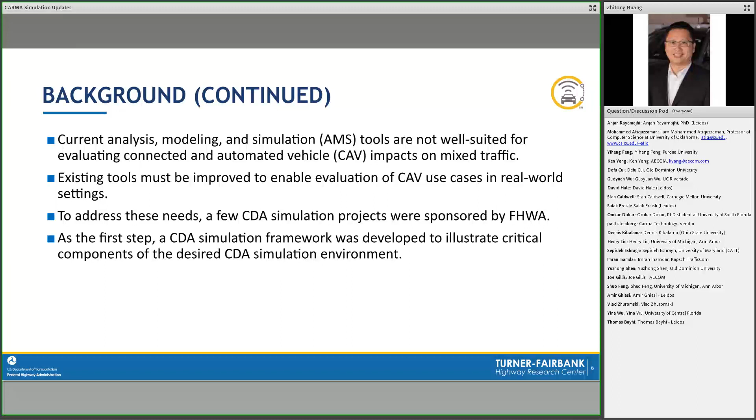So to identify the desired CDA simulation environment, the project team did comprehensive literature reviews and also collected suggestions from CDA technology users and experts. According to the results, a multi-simulation focused evolutionary framework for progressing CDA simulation capability is presented as shown on the right side of the figure.

This figure shows the desired CDA simulation environment has 5 major simulators: vehicle driving simulator, traffic simulator, traffic management center simulator, pedestrian simulator, and human driving simulator. Different simulators handle different CDA simulation needs. These simulators are synchronized and organized by a central simulation manager.

This core simulation functionality is then further enhanced and leveraged by a class of enabling technologies such as augmented reality and virtual reality, cybersecurity, artificial intelligence, and machine learning. Those are not the only potential enabling technologies. Many advancing technologies may open new doors for future research, but this area seems most closely related to the current research at this time. So in the next few slides, I will introduce these simulators and enabling technologies one by one.

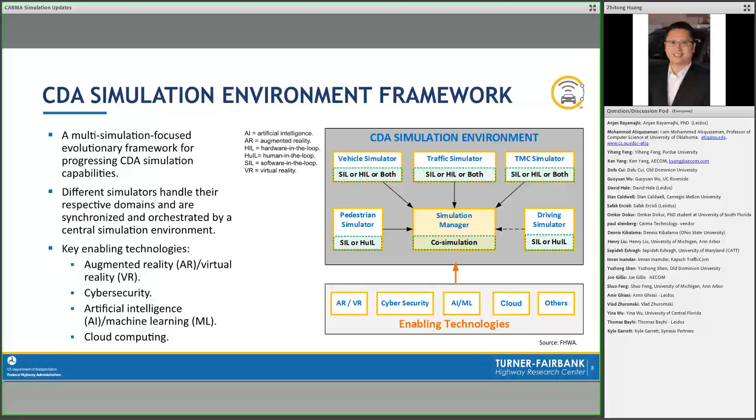So before CDA technology appeared, transportation engineers focused on optimizing infrastructure operation to improve the efficiency of the transportation system. Usually we provide more real-time information to drivers, such as dynamic speed limit and variable message signs, to help them make a better decision to drive their vehicle, to reduce congestion and improve safety. But there are very limited strategies to control the vehicle.

By implementing CDA technology in the transportation industry, it brings opportunities to let us control both vehicles and infrastructure to further improve the performance of existing transportation systems. On the other hand, we also need to have a vehicle driving simulator to make sure the proposed CDA application and algorithm are feasible to be implemented in physical vehicles, and also to make sure the CDA-equipped vehicle behaves as we expect.

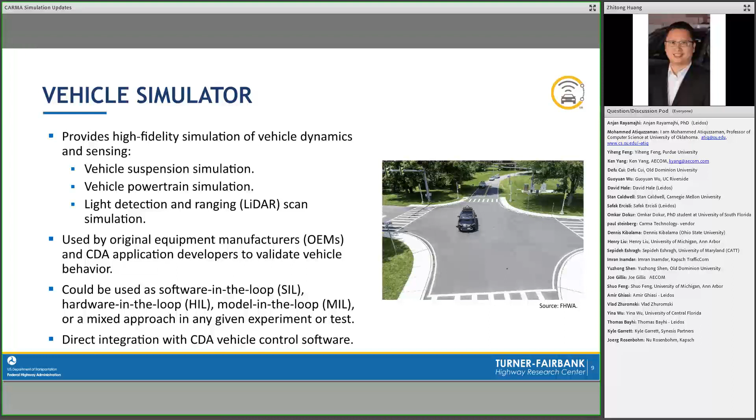So traffic simulator is very familiar for us. It is also a critical component of the desired CDA simulation environment. The traffic simulator can provide microscopic views of behaviors in the traffic system, and it can simulate the effects of the CDA system under test on that network.

It is widely used by state and federal Departments of Transportation for evaluating road designs, new traffic applications, and traffic management strategy, same as a vehicle driving simulator. Traffic simulator could be implemented by different approaches, such as software in the loop, hardware in the loop, and model in the loop, depending on the research needs and testing scenarios.

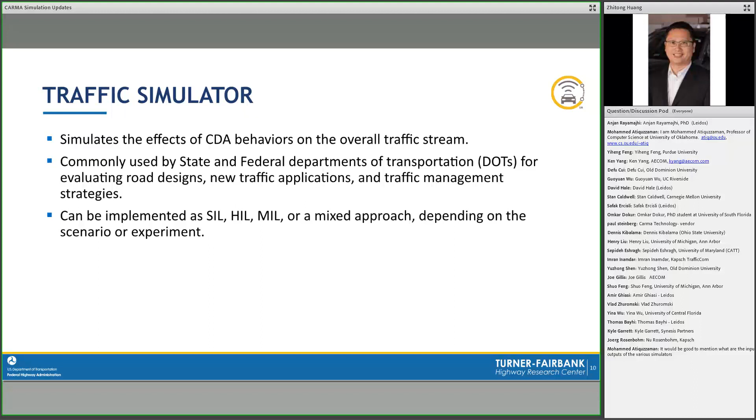Traffic Management Center is responsible for responding to incidents and events that may impact traffic system operation.

Because of the vehicle-to-everything communication feature, CDA technology provides an increased opportunity for interaction between CDA-equipped vehicles and the TMC. It becomes useful and necessary to study how this interaction occurs and what kinds of impact it may have on the transportation system.

It will help us develop the next generation of traffic management control strategy. So the preliminary model for this kind of interaction is CARMA Cloud, a system which provides real-time data feed into CARMA-equipped vehicles, alerting them to lane closures, weather events, and other events.

So the TMC simulator could help us test new CDA applications involving TMC interactions, such as testing new transportation systems management and operations use cases, and evaluating the effectiveness of different TMC strategies or algorithms.

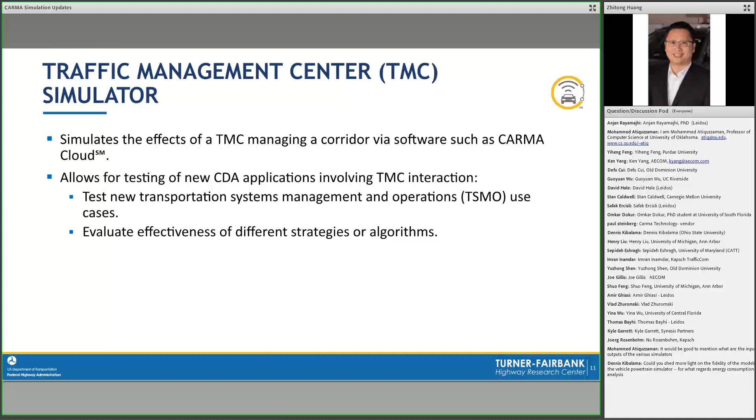The Pedestrian Simulator is another major simulator in the CDA simulation environment because safety is the most important aspect in transportation system operation and management. It's necessary to evaluate actions and behaviors of pedestrians and other road users with CDA-equipped vehicles.

For most pedestrian or bicycle-related CDA applications, safety is a major concern for testing. So with the pedestrian simulators, the CDA simulation environment could provide a safe environment for testing and evaluation of vehicle-to-pedestrian systems without any risk to participants' safety, because it can eliminate the direct interaction between a physical human being and physical vehicles.

For example, by using hardware-in-the-loop simulation for V2P testing, a pedestrian can walk in an isolated room for testing. The actions of the pedestrian will be translated into a simulated pedestrian walking at an actual intersection, letting a physical CDA-equipped vehicle interact with the simulated pedestrian.

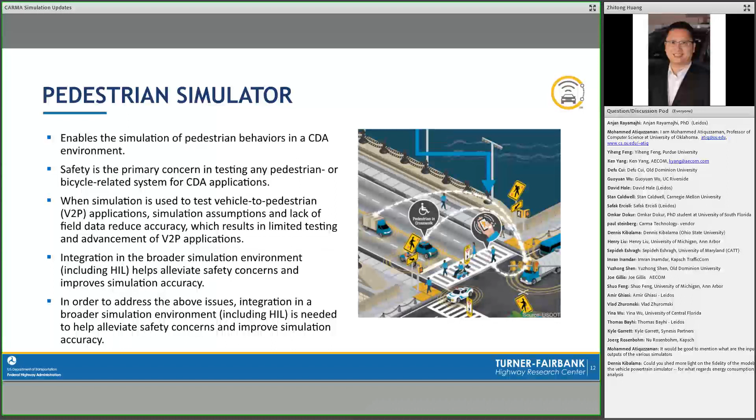Human driving simulators are widely used for human factor-related study in the transportation field. Integration of the CDA simulation environment with a human driving simulator could benefit researchers in the CDA field.

It can increase the accuracy of human driver behaviors for CDA research efforts. It also increases the accuracy of CDA application behavior for human factor research.

The same as the pedestrian simulator, if the human driving simulator is used with hardware-in-the-loop simulation functionality in the CDA simulation environment, it could enable safe, accurate study of how human drivers interact with real CDA-equipped vehicles, since human drivers and human-driven vehicles only virtually interact with the physical CDA vehicles.

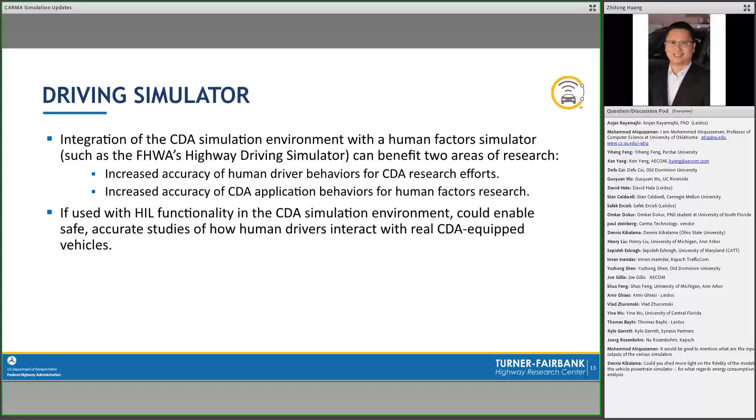As we mentioned before, the simulation manager is the core of the CDA simulation environment, since it coordinates and synchronizes different simulators, especially for data exchange and time synchronization. The simulation manager becomes more sophisticated over time as more simulators are added to the system.

The simulation manager also provides a uniform interface to let the user integrate with the CDA simulation environment by selecting their desired simulator.

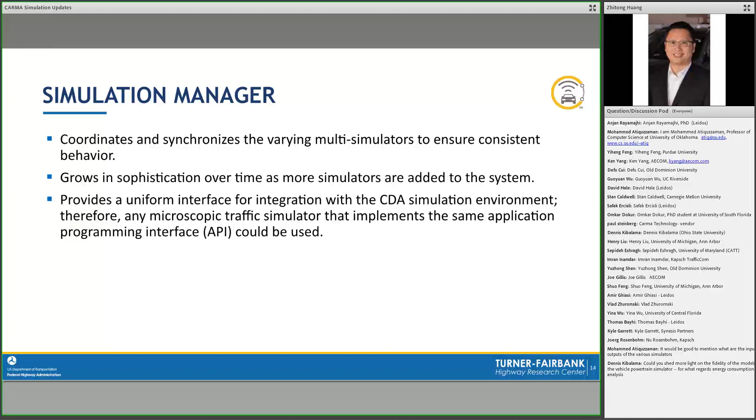We also want to bring a class of enabling technologies to further help us conduct CDA-related research. So the first technology we want to bring in is augmented reality and virtual reality. These two technologies are very helpful in CDA research.

It enables exciting new opportunities and also mitigates or eliminates any safety concerns, especially with hardware-in-the-loop simulation, as in the example I mentioned for the pedestrian simulator.

In addition, AR and VR can also act as a virtual link between the virtual simulated environment and the physical environment, visualizing the interaction of virtual vehicles with physical CDA vehicles and physical human subjects, and virtually demonstrating the virtual simulation environment.

It also can help us do data visualization for both physical vehicles and the simulation environment. More importantly, it significantly improves the demonstration capability at a test site.

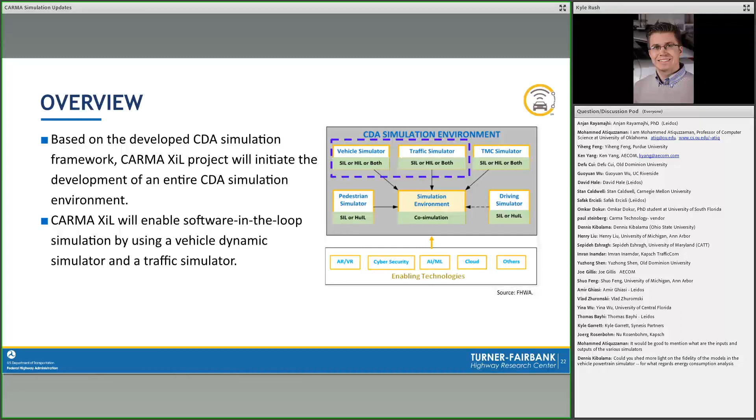So one of the first fundamental steps of building out this XIL project is to integrate the vehicle dynamics simulation and the traffic simulator with the CARMA ecosystem. The CARMA platform will be the primary cooperative driving automation system under study for the XIL platform.

It's the platform we're hoping to use to integrate applications into the simulation environment so we can begin to see their effects either from an individual vehicle level in terms of the controls behaviors of that vehicle, or at the broader network level as we evaluate things like how it impacts throughput or other traffic metrics. So we're developing this co-simulation platform to support that goal.

We're utilizing CARLA, Car Learning to Act Simulator, as well as the Simulation of Urban Mobility, or SUMO simulation software, for their vehicle dynamics and traffic network simulation respectively. CARLA will be the primary integration point for the CARMA platform, being the vehicle driving simulator best suited towards integrating cooperative driving applications or autonomous driving systems for our particular use case.

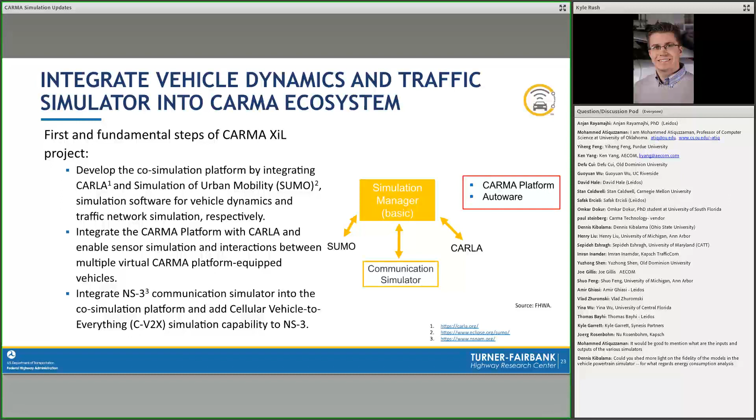The step beyond that, once we have the CARMA platform integrated for the study of its internal cooperative driving automation applications, would be to integrate the CARMA Streets platform into this entire framework. This is our second step into building out the CDA simulation framework: to bring in the CARMA Streets software integrated with SUMO to act as an edge compute device capable of running algorithms for traffic signal priority or other sorts of shared perception kind of applications.

Integrated with SUMO, communicating via the communication simulator with the CARMA platform vehicles, to enable the implementation, evaluation, and study of those algorithms and how they impact the traffic stream, how they impact the CARMA vehicles, and how they perform in and of themselves.

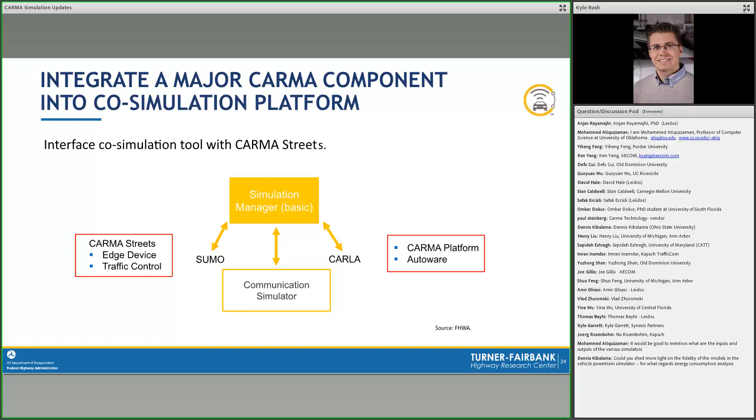So this integration will be done at the SUMO level, also plugged into NS3. It would be communicating with SUMO's internal traffic signal controller logic and would provide an entry point for application development on the infrastructure side of this simulation. And once again, this would come with an increased sophistication of the simulation manager itself, to support these new kinds of applications or use cases within the simulated environment.

Once the XIL simulation platform is finished developing and testing, we plan to release this tool to the public for support of development, testing, deployment of CDA algorithms and applications, so that the CDA algorithms and applications themselves can be evaluated by others and run in different scenarios, different test cases to continue and carry on some of this research.

We also plan to make it available for helping users to adapt and use the CARMA platform to support their own CDA research, whether this is at the prototype phase before building applications to deploy on physical vehicles, or whether this enables those who might not have access to physical CARMA platform-equipped vehicles to conduct their own cooperative driving automation research without having to go through the expense of acquiring a vehicle.

The project team also plans to provide technical support to users under the CARMA Support Services program. The CARMA Support Services program is a help desk run by the Saxton lab that provides technical support services, documentation, troubleshooting to users seeking to use any of the CARMA program software or having questions in general about cooperative driving automation. This help desk will, at this point, provide support for the XIL co-simulation platform once that's made publicly available.

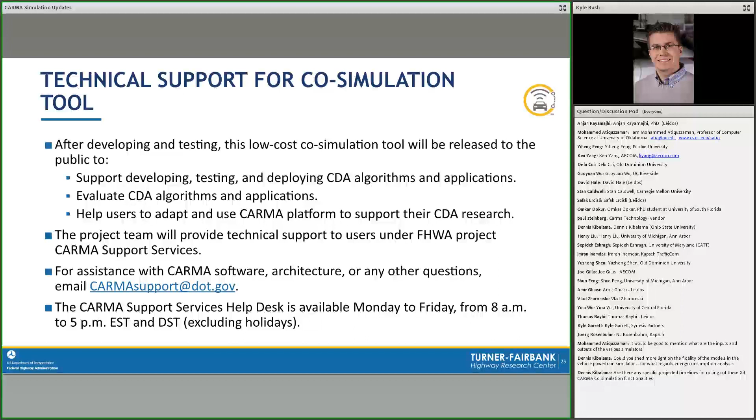And I believe that is the last slide. So I will pass it back to the group for questions and answers.

Thanks, Kyle. So this is the time to ask any questions if you have any, just put them in the chat. I see a few in here already, so I'm going to start with those. We have one from Mohammed. He said, it would be good to mention what are the inputs and outputs of the various simulators.

This is Zhitong. Actually, this is a good question. For the portion of the simulation I did, I just presented a comprehensive framework, which is a long-term development goal for us. Currently, we just start to work on the Everything in Loop project. That may be the first step. We will start to build the CDA simulation environment. So we are working on the framework and the architecture design document for this project.

So we will provide such information in that document. We would like to present or share such information with industry when the document will be ready. As we know, CDA technology is developing rapidly, so we think maybe it's good to just develop the design and architecture document when we decide to bring each simulator into the simulation environment.